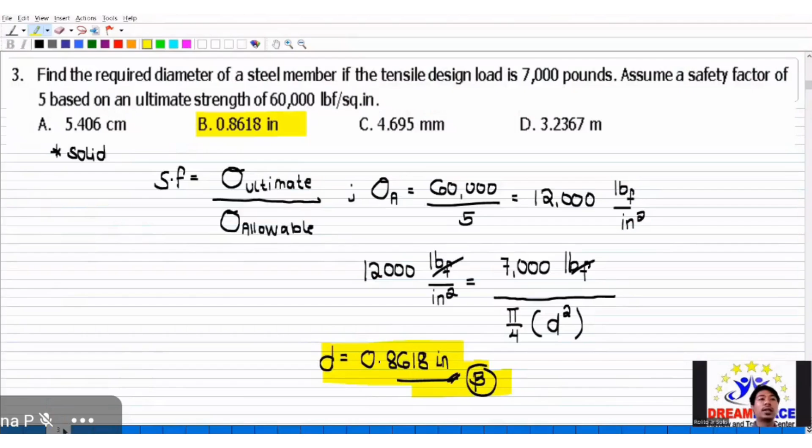So for hollow, what are we looking for? Thickness. The area is equivalent to pi over 4 times outside diameter squared minus inside diameter squared. Also, outside diameter is equivalent to inside plus 2 times thickness. As we can see in the problem, we have an outside diameter but we don't have the inside diameter. Since we're looking for thickness, we can derive it such that the inside diameter is also the outside diameter minus twice the thickness.

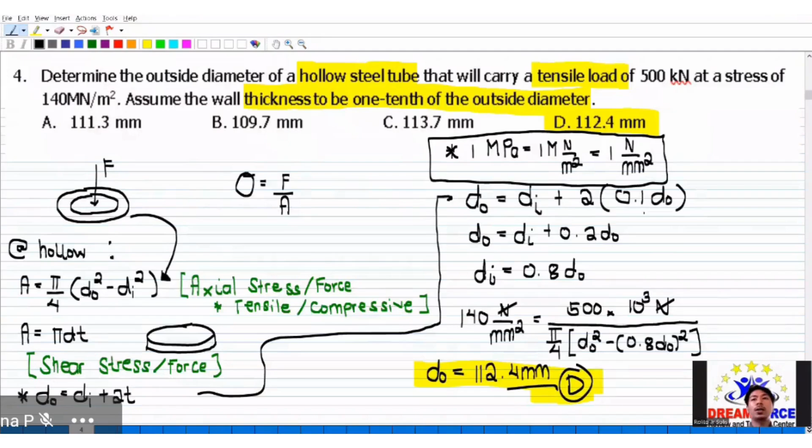Let's try that. Our stress unit is in millimeters - different subjects in ESAS already taught unit analysis, so I hope we've passed that. 10 MPa is also equivalent to 10 Newton per square millimeter. Again, if you're confused, go with whichever you're more familiar with.

This is equivalent to our force, 75 kilonewtons or times 10 raised to 3 in Newtons, divided by our area, pi over 4 times outside diameter. We're given 200 millimeters for outside diameter, squared, minus our inside - but our inside is 200 millimeters minus twice the unknown thickness, squared. Again, one equation, one unknown, so Shift Solve it. Solve for thickness.

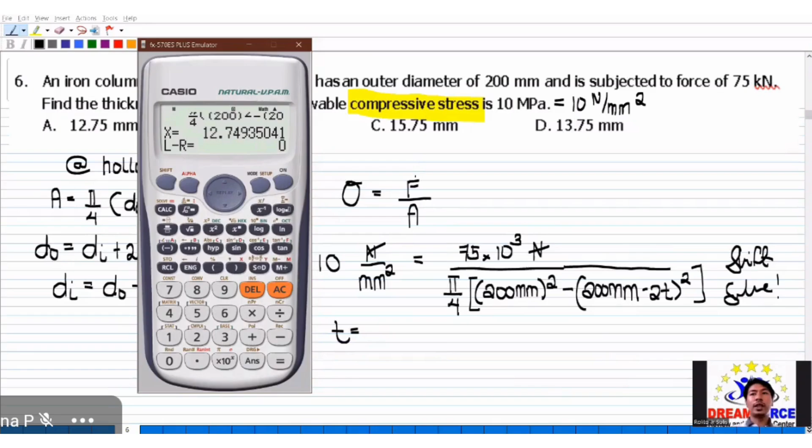What they give in board exams is usually basic foundations in ESAS, so hopefully we know those. The answer is 12.75 millimeters, which would be your letter A.

You should read the objectives because other lecturers usually say the percentage of objectives is higher compared to solving problems in ESAS. In EE, there are also many objectives. Okay, that's your number 6.

Next one, number 7: A steel tie rod on a bridge must be made to withstand a pull - pull is also force - of 5,000 pounds, based on the unit given. Find the diameter of the rod assuming a factor of safety of 5 and an ultimate stress of 64,000 psi.

Here we don't see any keywords or indications that it's hollow. So when there's nothing, we assume solid. For solid, our area is pi over 4 times d squared.

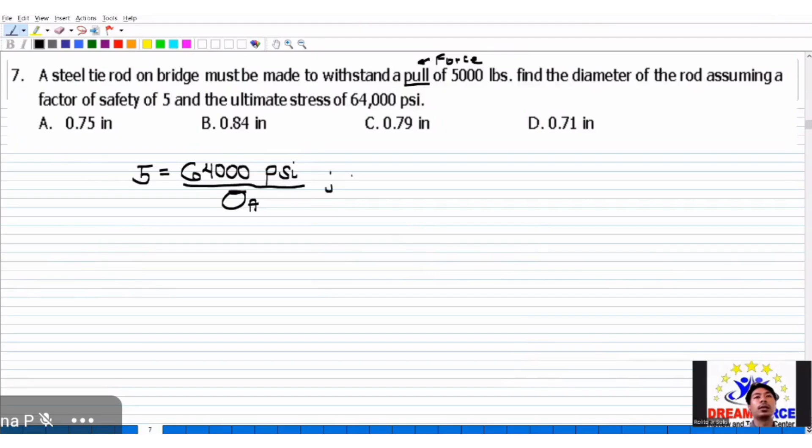We're given a safety factor here, so let's get the allowable stress. Safety factor equals ultimate stress divided by allowable stress. So our allowable stress now is 64,000 psi divided by 5, which is 12.8, or 12,800 psi.

Again, equating that to our formula for normal or simple stress - by the way, simple stress and normal stress are the same. So we have 12,800 psi, which is pound force per square inch, equivalent to our force, 5,000 pound force, divided by area.

What we're looking for is the diameter, so it's solid - pi over 4 times the square of the diameter. Again, Shift Solve it: 12.8 is equivalent to 5k over pi over 4, times x squared. Shift Solve gives us 0.71.

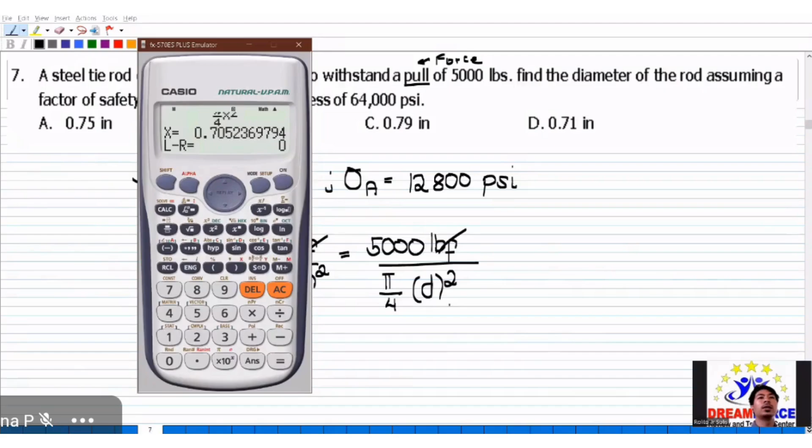So the answer is 0.71, yes, on letter D.

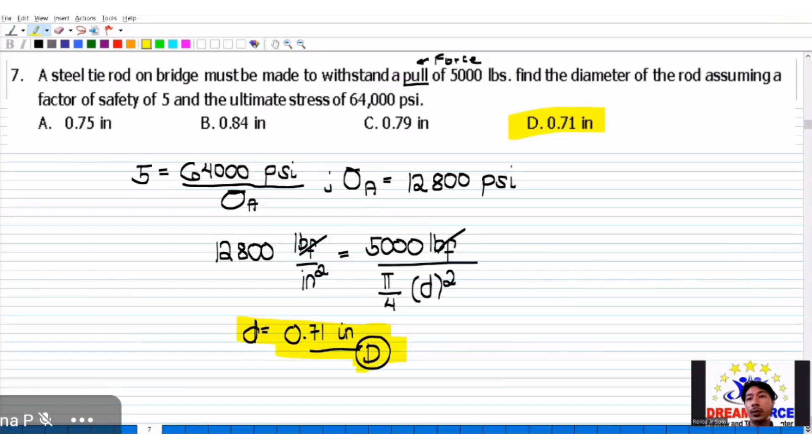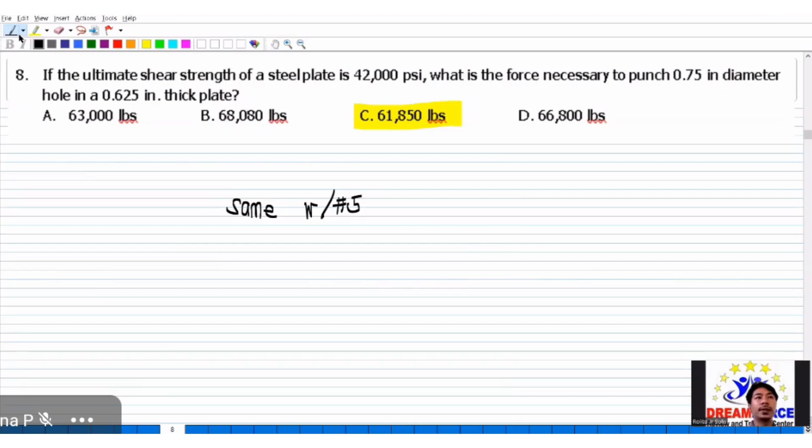Okay, so next, si number 8. Parehas po ng solution sa number 5, yun nga lang ay hindi po siya nakakilot. Okay, di ba nung college, strength of materials, I think 5 units, no? Kaya madami talagang topics. Ayan, okay, so dito na po magsa-start yung mga iba't ibang topics natin.

Number 9, what modulus of elasticity in tension is required to obtain a unit deformation of 0.00105 meter per meter from a load producing a unit tensile stress of 44,000 psi. Okay, ayan, so another topic natin.

Okay nga pala, so yung objectives ng strength of materials, isama nyo rin yung materials, engineering materials. Okay, so yung formula na gagamitin natin dito, ilalagay ko na lang siya na may mnemonics na mas madaling ma-memorize. Okay, stress is EE.

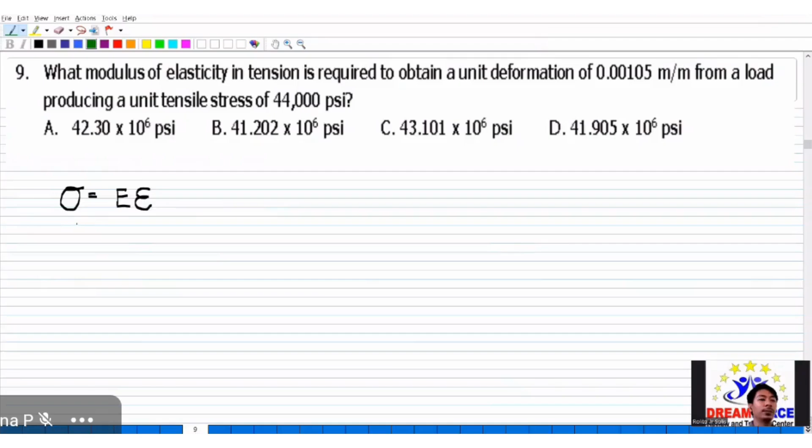Okay, so stress is EE. Ito po yung stress natin. At yung E, ito po yung tinatawag na modulus of elasticity. Okay, so different, constant po ito, no? Depende doon sa material na ginamit natin.

Kumbaga ito yung isang value ng isang material wherein kung pwede siyang i-bend or hindi. The higher the modulus of elasticity, syempre mas matigas, okay, or hindi po siya nabibend. Different po yan, depende sa material, o kumbaga parang density sa fluids. Di ba, may constant na density ng water, may constant din na density ng seawater, ng mercury, and so on. Okay, they are constants.

Okay, so madalas na ginagamit ay steel. Minsan engineers hindi po binibigay sa problem, kaya dapat memorize natin. Okay, unit ng modulus of elasticity ay pascals, so stress din po yan, or the same as the unit of stress. So another name for modulus of elasticity ay Young's modulus. Okay, so again, same unit, no, ng ating stress. So Pascal, PSI, and so on.

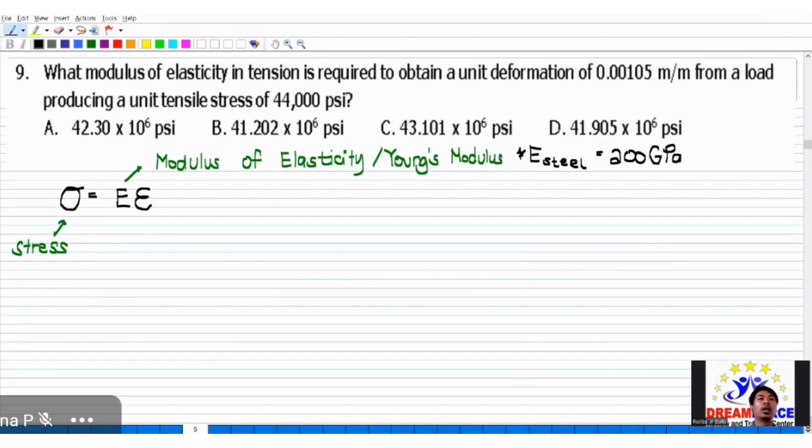Ito namang E, ang tawag po dito, ito yung strain. Okay, volumetric strain. Madami kasing types ng strain, no? Okay, so ito naman po ay unitless.

Okay, so yung formula lang naman, no, yung kailangan natin. Direct substitution. Ang hinahanap dito ay modulus of elasticity. So substitute lang natin, we have a 44,000 PSI. Okay, so this is equivalent to, we have the modulus of elasticity multiplied by 0.00105, E. Okay, tinatawag din yan, minsan may elongation yung strain.

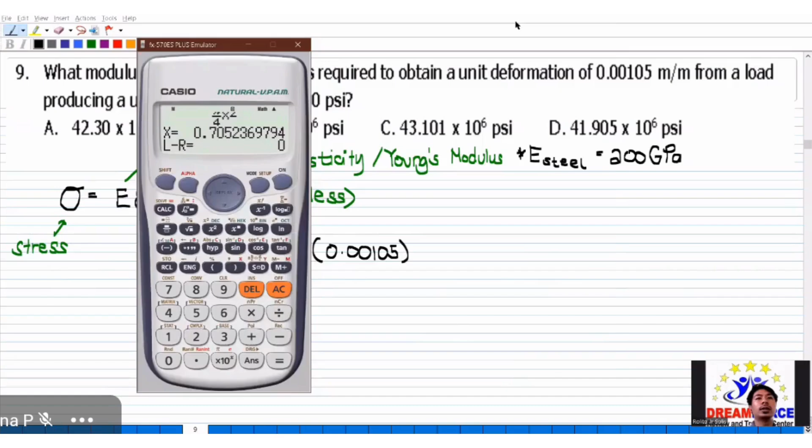Di ba, so pag meron tayong applied stress, hindi man natin nakikita, kunwari pag may force tayo, syempre meron yung stress, no? Okay, so hindi man natin nakikita, nagde-deform. Or tawag din dito deformation, nagde-deform yung ating material. Sorry for that, hindi pala siya elongation but other deformation. Okay, yan, hindi kasi natin makikita kasi sobrang liit.

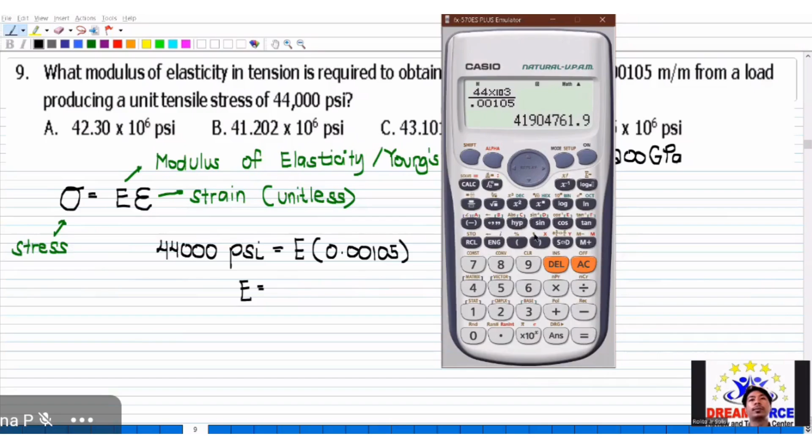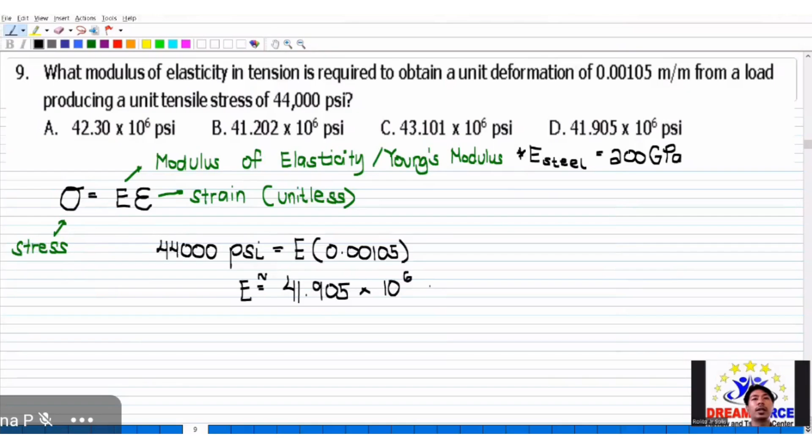Okay, so sagot dyan ay approximately 42, or hindi, meron pala sa choices, 41.905 times 10 raised to 6 PSI. Okay, letter D.

So syempre, dapat mas mataas yung, anong mas mataas dapat? Yung E or yung stress? Syempre, dapat mas mataas yung E. Kasi pag lumagpas na yung stress doon sa E, magbe-bend na. Magbe-bend na po yung material natin, fully, okay, kumbaga makikita na, kitang-kita na yung deform, or yung bending ng isang material na. Kaya dapat, as long as possible, mas mataas yung E natin compared sa stress. Okay, so that is number 9.

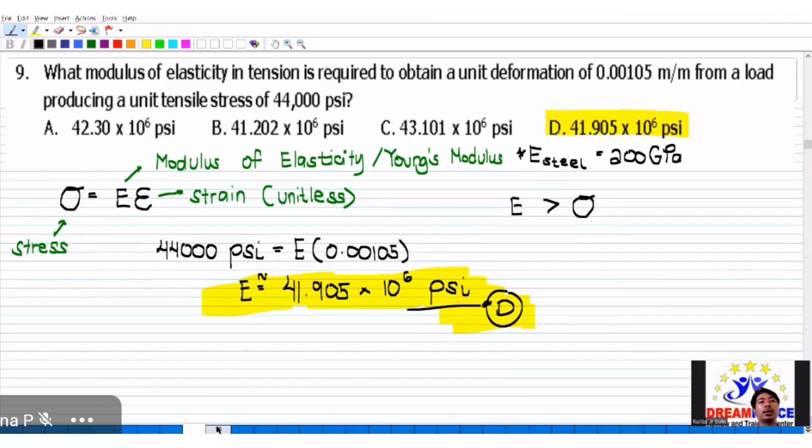Okay, so next one, number 10, hollow shaft, okay, another topic po tayo. So madami po tayong topic, sasahan nyo, madaming formula na madi-discuss dito. Okay, so next topic tayo is sa shaft. Ito naman, yung shaft, makagamit natin to sa DC machines. Okay, so dyan natin kinukuha yung power. Kaya parang ito lang yung topic ata na may application sa E.

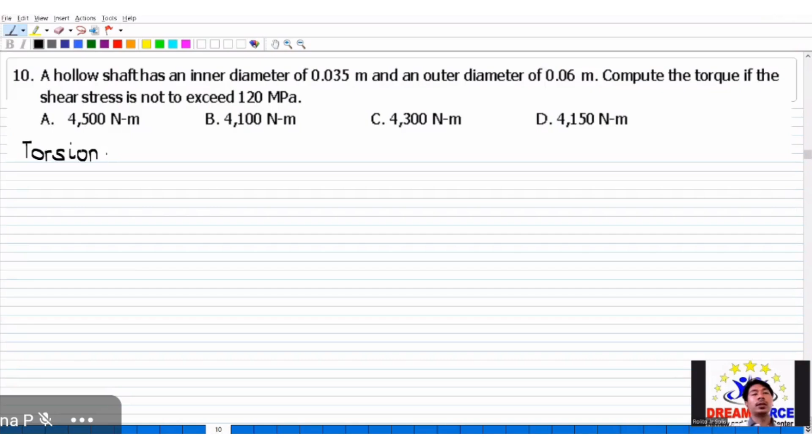The hollow shaft has an inner diameter of 0.035 meters and an outer diameter of 0.06 meters. Compute the torque if the shear stress is not to exceed 120 megapascal. Okay, so at shaft, so ang tawag naman sa stress ng shaft, since umiikot po yan, ay torsional stress. Okay, torsional stress, ito po yung stress kapag umiikot yung isang material natin.

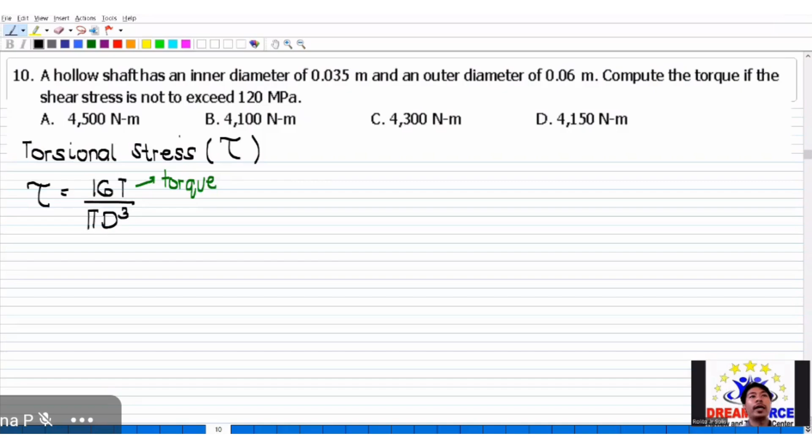Usually, applied po yan sa shaft since umiikot yan. Okay, so para hindi kaparehas doon sa symbol ng normal, ganito na lang, tau ata yan, tau. Okay, so meron tayong formula, torsional stress or the stress on the shaft. Okay, the torsional stress, this is equivalent to 16T divided by pi d cubed. Okay, so T is your torque, alam naman na natin yung unit ng torque, no? It can be either Newton meter or pound foot. Ibig sabihin force times distance. Okay, gagamitin po natin yung formula na to. So, if our shaft is solid.

Okay, so what if the case is hollow? So for hollow shafts, this is the formula: the torsional stress is 16T divided by pi, multiplied by our outside diameter raised to 4, minus the inside diameter raised to 4.

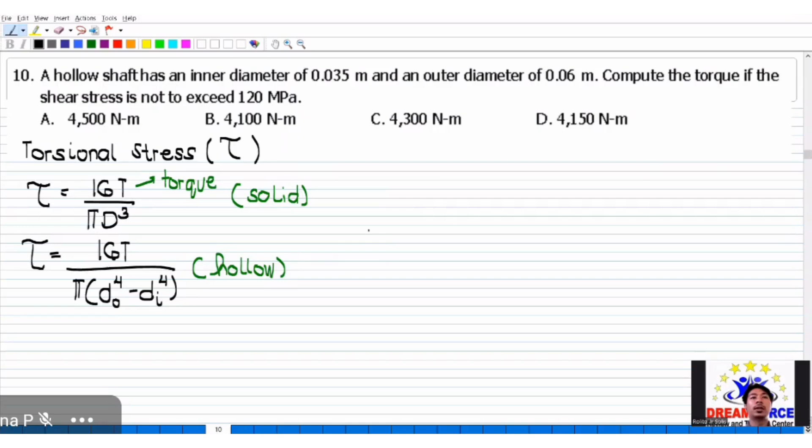So this is what we'll use if the case is hollow. For number 10, we have a hollow shaft, so let's substitute, we're looking for the torque. So therefore, this is the torsional stress.

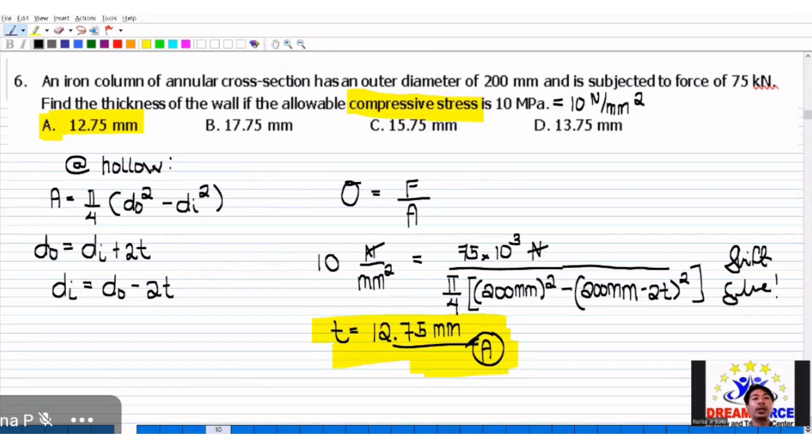So engineers can get confused, it depends on the situation which units I use. That's already been taught, right? Use whichever is easier. Like earlier, I used Newton per square millimeter since the choices were in millimeters, and the other units were also in millimeters. But this time, I will use meters, since the choices were in meters and the other units were also in meters. It depends on which is easier.

So hopefully we've mastered unit analysis. If not, please exert effort to review more, to practice more on unit analysis. It's very important in the ESAS.

This is equivalent to 16 multiplied by our unknown torque, divided by pi times the outside diameter, which is 0.06. Both are already in SI units, so there's no problem. Minus 0.035 in meters, that is also raised to 4. So again, we have one equation with one unknown.

You can do shift solve or calculate. Let's do shift solve. So we have 120 times 10 raised to 6 equivalent to 16x divided by pi times 0.06 raised to 4, minus 0.035 raised to 4. Shift solve, let's say 4,200 - oh, that's wrong. Let me try again: pi times 0.06 raised to 4 minus 0.035 raised to 4. Wait, let me try. Raised to 6? So 120 times 10 mega. This should be right.

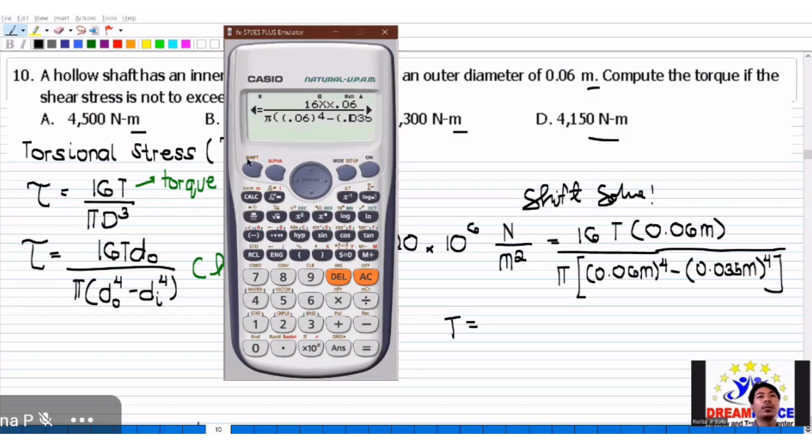0.06, 16t, 120 times 10 raised to 6, 16x times 0.06, minus... there, okay, that was a typo, this should work now. Okay, so the answer is 4,500.09.

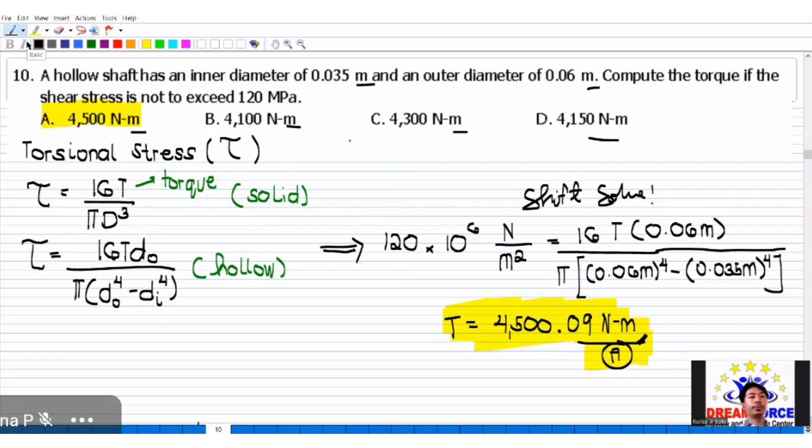Okay, so that's number 10. Next one, number 11.

A 2 inch solid shaft is driven by a 36 inch gear and transmits power at 120 RPM. If the allowable shearing stress is 12 KSI, what power or horsepower can be transmitted? You'll see this in DC generators, DC motors, alternators, and AC motors also.

This is what you'll use later on. Again, we're still on shafts. We have a formula for power. We know by definition that power is the rate of doing work, or the rate of energy. We have the formula here: power is equivalent to 2 pi NT.

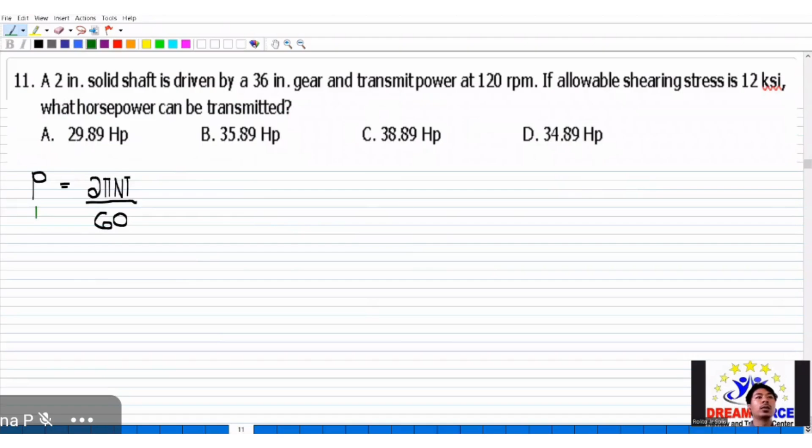Divided by 60. Let's define what these are. This P, you'll use this formula. This is power, and the power should be in watts. And N, this is the speed, the speed of the shaft, which is rotating, and the unit for that is revolutions per minute or RPM. You've used that in physics and mechanics, right, V equals R omega.

This omega can be transformed or converted into RPM. And then this T, we already know that, that's our torque. Since watts is the SI unit of power, therefore all your units here should also be SI. The SI unit of torque is Newton meter. Some engineers use power equals 2 pi NT over 33,000 instead.